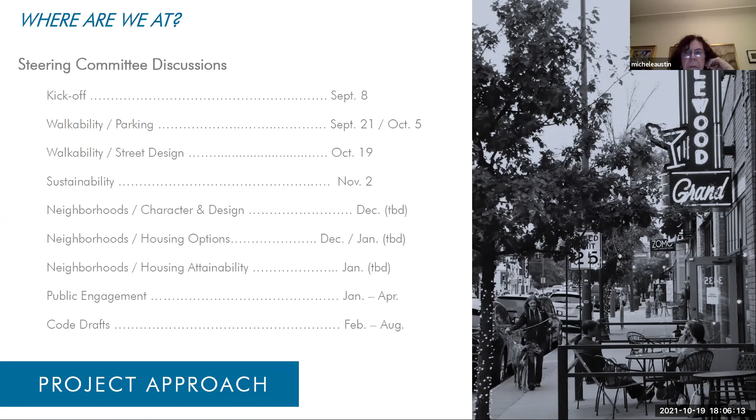Okay, people have been asking me questions about what we're going to talk about next, and I didn't have an answer for them. So, okay, great. Thank you. Yeah, and we didn't either, really, to be honest, other than we knew we were going to address those 5 topics, but we hadn't organized it in this fashion. So it's a timely question, and we'll get that information more broadly disseminated. Perfect, thank you.

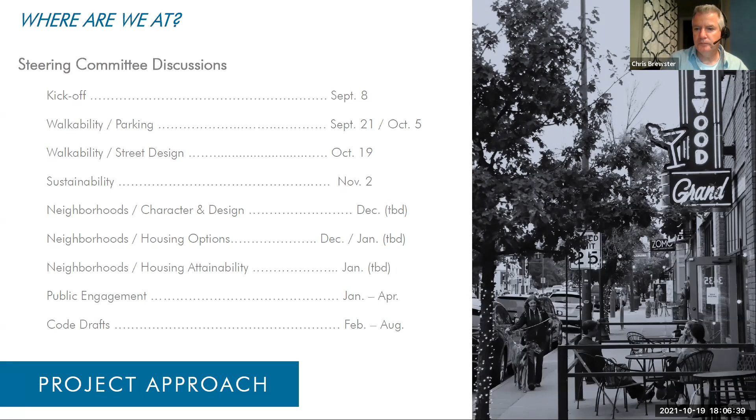Any other questions or thoughts on the big picture? Okay, as I mentioned, so... go ahead. I got a question, it's not really a question, it's a request I guess. The phase 1 questionnaire, has that been distributed? And if it hasn't, can we have that distributed to the Planning and Zoning Commission?

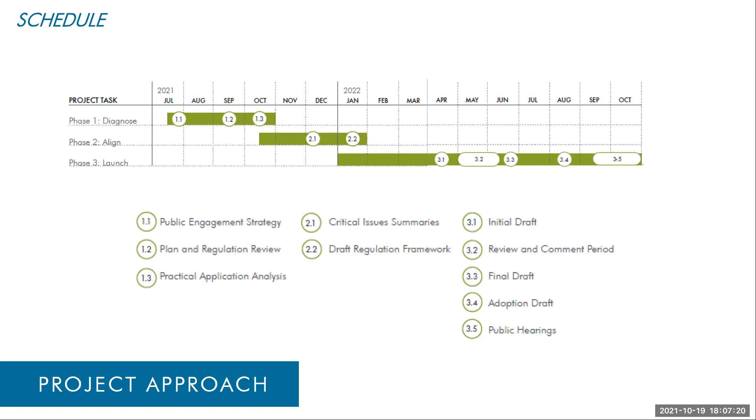The results of that questionnaire? We haven't done a questionnaire up to this point. Can you help me out with that?

Somewhere in the presentation tonight, it talks about a phase 1 questionnaire, so we'll eventually get to that. When we get there, I'll point it out. Just raise your hand again, and we'll talk about it when we get to that point. Thank you.

This is just a graphic representation of the schedule, showing us still in the fact-finding, information gathering, and discussion phase, and then beginning some of the drafting and putting strategies and solutions together throughout the beginning and mid part of next year.

So why does street design matter? If you remember back in our kickoff meeting when we talked about our approach to codes, we take a design-based approach, and that was what your plan and code assessment suggested—more regulations on building form and community design. From our perspective, it all starts with the streets.

The streets set the context for a lot of different things, and the design of the streets will tell us a lot of what we can expect from development. It's critically important to know what's a reasonable way for the regulations to request or require development to respond. So it sets the context, and the relationship of projects to the street is crucial.

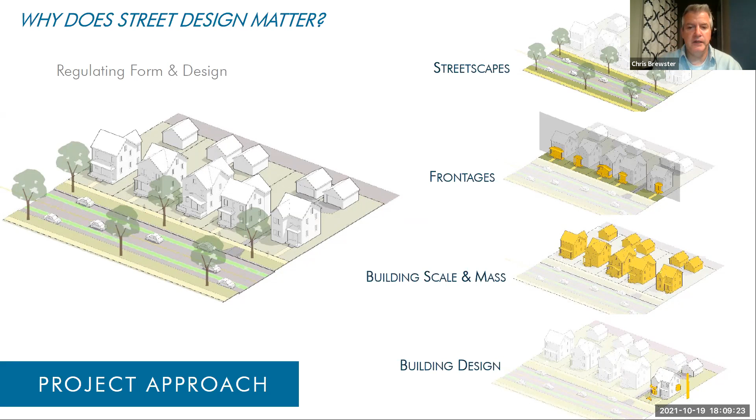It goes from streetscapes to frontages, then we begin talking about building scale and mass and how places come together. The last part becomes building design—what a building actually looks and feels like when you experience it. But it all starts with the streets in our mind, and with walkability being a key goal in the community, it even more so starts with streets.

So what does your development code say? Honestly, not a lot, which isn't necessarily bad, but it does create some questions for us and things we need this committee to discuss. It's addressed in two main places in the development code.

There's a section in 16.6.3 that talks about access and sites, discussing streets at a number of different scales—clearly a section geared more toward site access, but it begins talking about vehicles, pedestrians, and streets. It's also listed in 16.8.7, your subdivision regulations, where we most often find streets addressed in development codes.

One key point, obvious to all of you: subdivision regulations deal with building and designing streets when you plat property and lay them out for the first time. You won't be doing a lot of that since you're essentially a built-out community and a lot of your streets are built. So you're not in a situation where we'll be regulating the design of streets into existence through subdivision regulations, but we do want to make sure the development code coordinates with street design for reasons we'll hit on during the discussion phase.

The second place the code addresses streets is where the development code refers to the design and construction specifications—a separate document, with sections 1-2-3 and 1-2-12 covering street design. The good news is they coordinate. We often run into cities where those two documents don't coordinate and conflict, requiring reconciliation. At least in your case, those two documents are singing from the same sheet of music.

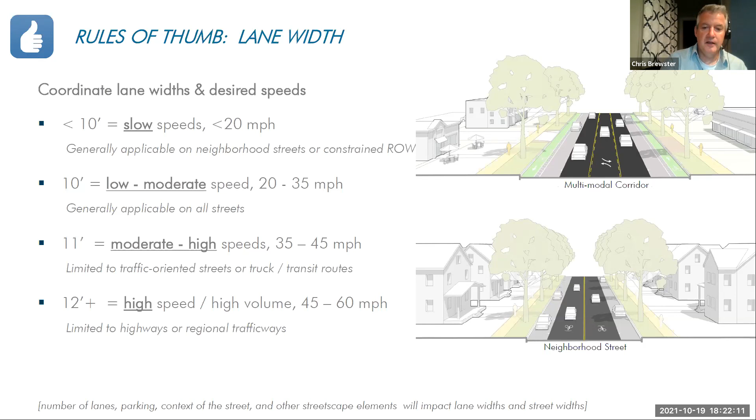The second one is on parking, that good friction. Typical widths we see would be on a residential street, 6 to 7 feet; on a commercial street, 7 to 8 feet. And angled parking, if you had enough right of way, anywhere from 14 to 20 feet, depending on the angle of the parking and whether that car is backing into a moving lane or a secondary lane. All of those decision points go into that.

The one point to note is that on residential streets, using a 6 to 7 foot lane accounts for the idea that the average car is usually between 5.5 to 6.5 feet wide. So 6 to 7 feet, you might say, isn't enough space. But on residential streets, it's assuming a lot of curb space is being absorbed, traffic volumes are low, there aren't as many conflicts, and doors entering traffic aren't as many conflicts either. That width seems sufficient to balance those things—not in every case, but as a rule of thumb. In commercial settings where you expect frequent on-street parking and frequent traffic, that extra cushion to absorb the entire parked vehicle is important.

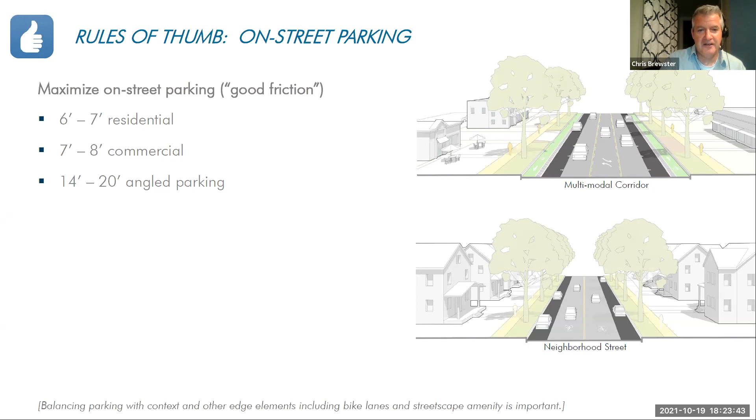Parking lanes compete in priority with bicycle facilities, and some general rules of thumb apply there. The main one is that what's important is comparable speeds. So bikes on sidewalks is not a good idea—those aren't comparable speeds when you think of bikes as transportation. People walking at 2 to 3 miles an hour and a bike at anywhere from 10 to 15 miles an hour—that's a conflict, too great a speed differential.

When you move bikes into the street, the rule is: the higher the traffic, the more protection you need. These widths range from no facility—because the street is tame enough that bikes and cars should comfortably mix, due to vehicle speed or low volume, or a side street situation—to the Sharrow, a term coined by the city of Denver, which may have some baggage depending on which camp you're in on bike transportation. But it's at least a strategy to consider when you don't have enough space for a dedicated facility and speeds are low enough that giving bikes extra cushion, signed and posted, can accommodate them.

But the ideal is really a dedicated lane, anywhere from 5 to 7 feet. That depends on whether it's a curb edge with no conflict with parking, or a situation abutting parking where there are concerns about door openings. That 5 to 7 foot dedicated lane seems to be the sweet spot. Anytime you get speeds over 40, you're talking about a significant speed conflict, so there should be a protected lane, off-street facility, or something similar. Again, these are just rules of thumb to help figure out what we can do with the limited space we have.

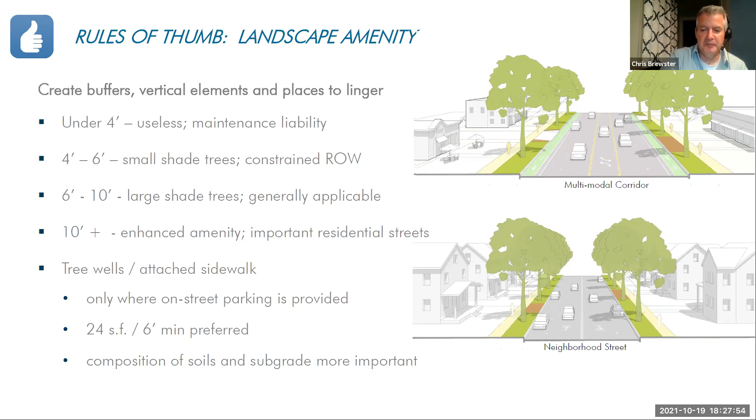So these are just some of the good rules. The other part about trees - our landscape architect constantly counsels us that regardless of the space, whether you have just enough, not enough, or plenty, what really dictates how well trees do is how they're planted and the composition of the soil and subgrade. They're big on the idea that you can get a great street tree in anywhere, it's just a matter of how you prepare the area and plant it. But thinking of the space in this dimension can still help us.

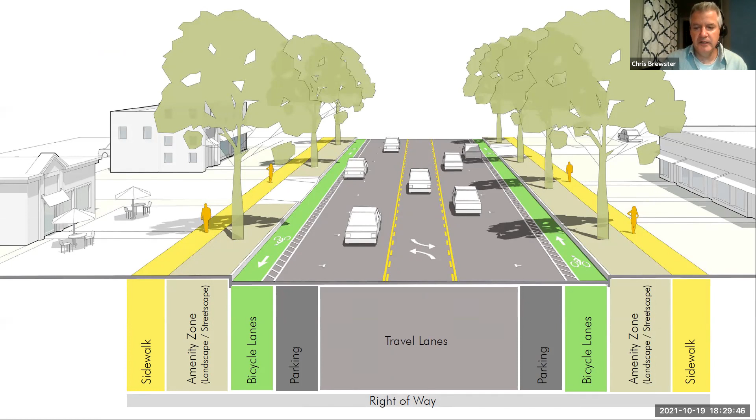Similarly, for the standard local street, this is the minimum right-of-way width, minimum sidewalk, and a roadway width that's fairly wide - it's 36 feet, with not a lot specified about what's supposed to happen within that space.

So we just put in the parking and the lanes according to that rule of thumb, and you have a lot of leftover space on these streets with that standard. So this is one way to think of that space and rearranging it, taking some of those amenities and actually expanding them out. In the 50-foot right of way with the 36-foot wide street, you can't fit these things. So this would bump up to a 60-foot right of way, adding to the outside, but we're still left with that wider street in the middle.

So then we did another scheme that took that 50-foot right of way and simply rearranged it. I think you have several streets that follow this cross section: it's 28-foot wide, and from our Google Earth rough math, we found several of your local streets with this quality, even though it didn't meet the minimum code, which suggests the street needs to be 36-foot wide on a local street. But having different solutions for different contexts, this would be a 50-foot right of way that apportions the street to some of those things.

The other thing to point out here is you can start to see the approach to bicycle lanes and parking and where you balance that. This one suggests they merge because it would be a slow, low volume street, so a bike facility wouldn't be needed and more frequent on-street parking could be done. There would certainly be other streets, whether a priority bicycle route or just too busy to have bikes and cars merging, where you'd see the parking disappear and a bike lane go in its place.

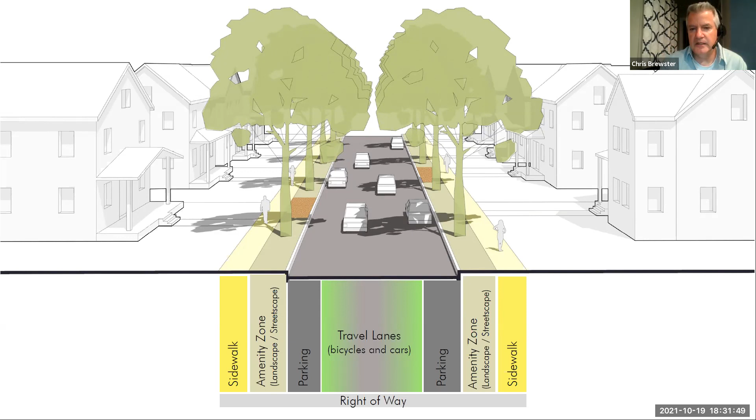So those are all decisions that can happen on a context by context basis to get better street design. Again, to the extent that your transportation plans and policies haven't accounted for these things, they're not difficult to build in with some simple rules of thumb to help give us cues. It may not answer the question for a standard in every situation, but it can set up a decision-making process. So we've built things like this into development codes where it may not spit out a specific cross-section, but it would spit out a thinking process for how we utilize that 50-foot, 60-foot, or 80-foot right-of-way, depending on the context and some of these balancing priorities.

That's really all I have to introduce the topic and discussion. We did throw together some things, just our observation of what we think we want to accomplish with street design in the development code, particularly because of your unique situation that you aren't often platting new streets, but we do believe the development code needs to address these topics in the event that you do. We also want some document guiding the design of these spaces so we have an answer for when these things need to be coordinated with development.

So our objectives: one, we want to better coordinate the development code with other standards and outside guidance rather than just punting to them. We want to make sure we know what's in those as well, so that they're all speaking the same language and accomplishing the same goals. We also believe we need more specific guidance for different contexts so that we can answer what's going on within some of those spaces.

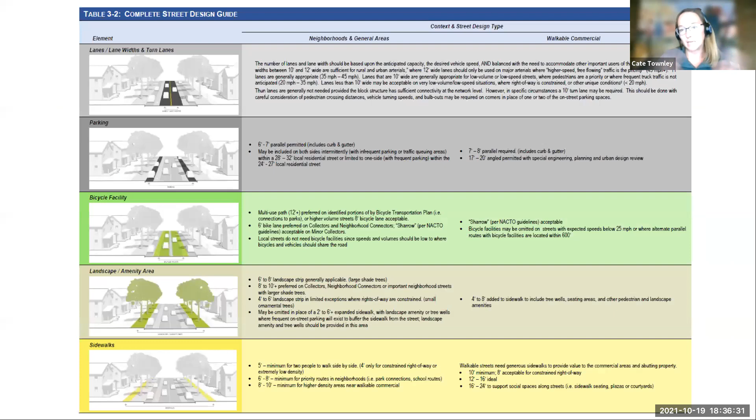And I don't know, I personally would be a lot more comfortable having more protected bike lanes, even with cars going at a lower speed next to people. And I think there's been more research coming out showing the return on investment, and the higher use of lanes that are actually protected and separated from cars versus just a dedicated lane.

And my personal opinion, I don't even think sharrows should be an option because I don't think they do anything. So I would want to just get rid of those, and we should expect bikes on every street.

So I definitely appreciate all those different suggestions. I'm wondering, what is the role of the city traffic engineer or transportation engineer in terms of—we put in best practices, refer to NACTO or things like that, and then it's essentially still up to the engineer whether or not they get implemented. So I guess that would be one question.

And another question I would have, and you can address this later—at least the experience I've had on my street is that the street is wide enough for cars parked on both sides, and this is just a residential street, and for 2 cars to pass each other driving. And then the right of way extends 10 feet up past the sidewalk into the yard. So do we have a sense of how much right of way we actually are working with within the city? Because that's a huge asset to have that much land within the city to potentially be working with.

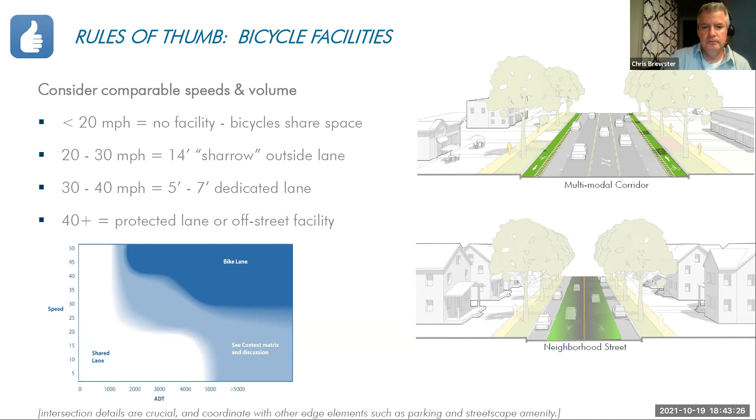Any other thoughts or questions or things we need to be aware of that you've encountered?

Christine? What are other cities that are built out like ours doing in terms of attached versus detached sidewalks? And if you have one house in the middle of the block that gets scraped and rebuilt, what do you do about that? Yeah, that's one of the discussions we had with staff last week - most of these projects, if the solution is a redesigned right-of-way, you usually have to address it on a block scale, unless it's one of those more interim strategies where there could be steps toward that end solution.

We're starting to look at some of those options, but there's no magic answer for that, unfortunately. The worst scenario is a one-lot development where the rest of the block doesn't have any impetus to change the cross section. Those will be really challenging.

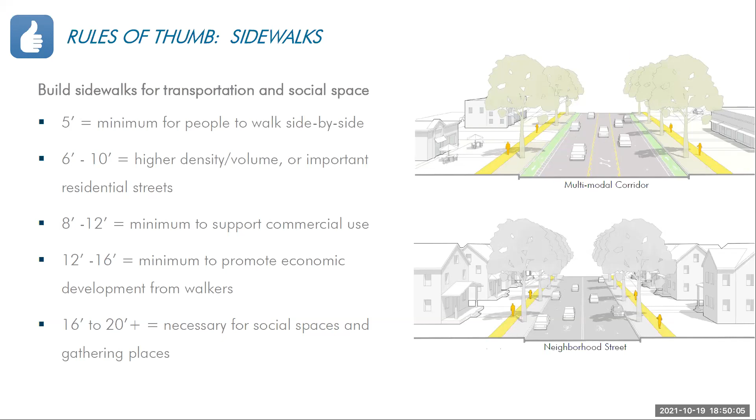Thank you. Yeah, I would say it would be good to make sure that we have accommodations for benches and outdoor seating and have them be welcoming to folks. I was reading an article from China where, in one of their cities, you now have to pay to use a bench in a park, and after your time's up, spikes come up and you have to go. It's essentially to keep people moving. But the purpose really is to keep people hanging out, which often means they're creating more connections and visiting businesses. So I think it's good to be considering those social spaces in these gathering spaces.

On this particular slide, something to think about is that we've heard through a lot of other feedback sessions how important our parks are and how much people value parks, yet we don't have much more space to build new ones. So really being able to think about these wide right-of-way areas as places to have linear parks, more opportunities for trees and shade, or benches for people to hang out. A question would be, if we suggest changes like that for the code, how that may impact public works versus parks and recreation, and if there's support from those departments to create more social or gathering spaces along different right-of-ways.

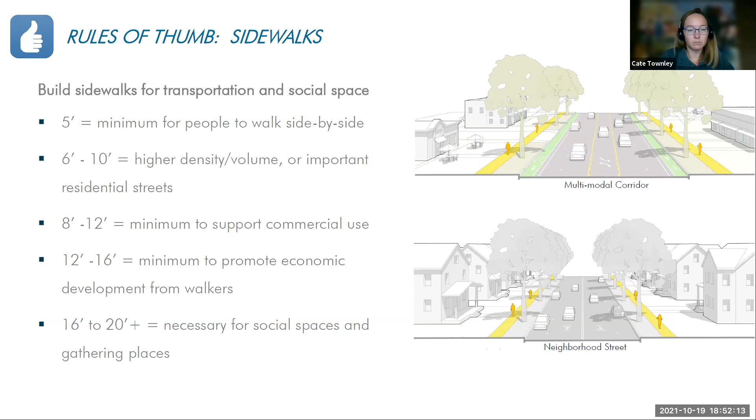Any other thoughts or suggestions? One of the things I think we would expect to do is compile some of these comments and notes to add to this list of objectives and things we need to be coordinating, and getting back to you all with answers. But then also for the next meeting, coming back with something that confirms the direction, or at least things you want us to be exploring, or where there is consensus on what we're trying to achieve, perhaps even helping direct the drafting already. We want these discussions to build into our broader public engagement, both at the public level and the technical committee level. You all have brought up a lot of things that will need coordinating between different departments. That's really helpful for us too.

Cate Townley? I might as well ask one more thing. I'm wondering about, in terms of coordinating and what's possible, moving a curb can be very expensive, or impact stormwater and things like that. So I don't know if the code is the right place for this, but where might there be opportunities to still narrow the right of way or narrow the lane widths without moving the curb? We have an example of that with the mid-block crossing on Broadway, creating a bump out, but they didn't actually move the curb and gutter. So can we still think about some of those things as we're considering different sidewalk widths or street designs that may not require, maybe at some point we'll have enough money to change the whole stormwater system and the gutter system, but other things we can do for now, or other possibilities that may not be as intensive in terms of changing big parts of the infrastructure.

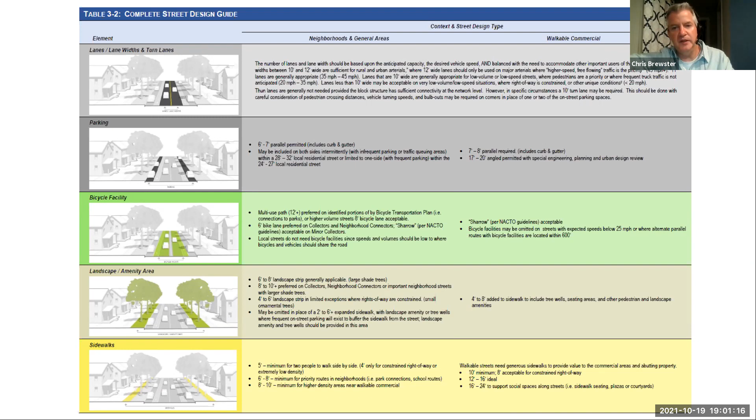We know we're not going to spit out the exact right cross section every time, so this could be another tool that either lives in the development code, is an appendix to it, or is something that's used to coordinate some of those separate documents. So that would be the second thing.

And then I'll go back to this table right here, it's in the development code. What I would see as an easy fix is that if we know the sidewalk minimum needs to be bumped up, if we know there's also a landscape amenity and a bike lane amenity missing from these typical streets, and if we know the arterial street might be a multimodal transit arterial, a traffic moving arterial, or a walkable slow street arterial, it's very easy for this table to expand and give some of those parameters as well.

I think this is a given that this is in there now, and we want this to have some simple amendments that start to account for some of these things. It could then refer to that decision document I had up, the colored matrix that starts to identify some of the trade-offs and decisions.

It could end up in some basic cross sections that we know will work in most cases, and those go in here. But this table right now is exactly coordinated with the design and construction specifications, where most of the guidance is coming from. So we would expect those two to coordinate when we're done with this as well, regardless of whether there's just a few simple amendments to this table that get us going down the right path, or if it becomes a little bit more of a complicated table. I think it'd be pretty easy for those two documents to continue to coordinate.

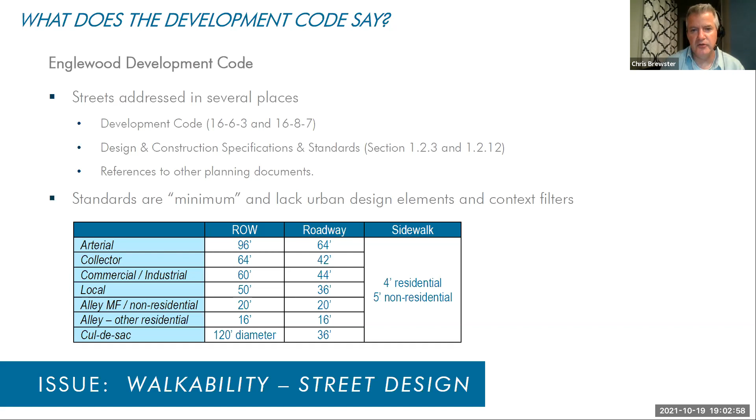I think the harder problem is that a lot of these discussions or bigger picture planning policies need to be addressed in these documents. But without knowing an exact answer to your question, I think there's a few things that we know we can do as a bare minimum to get some of these ideas incorporated.

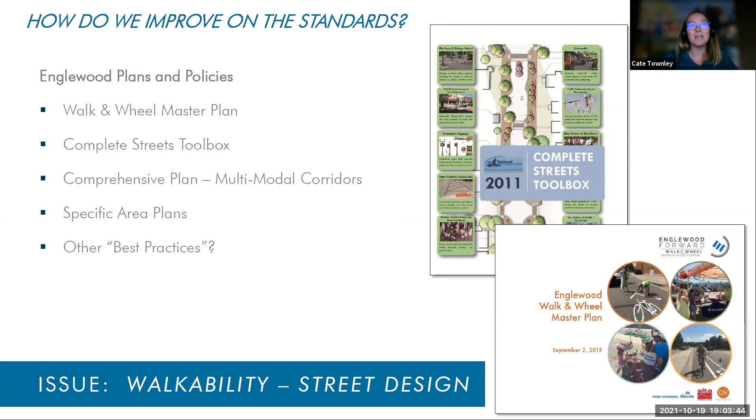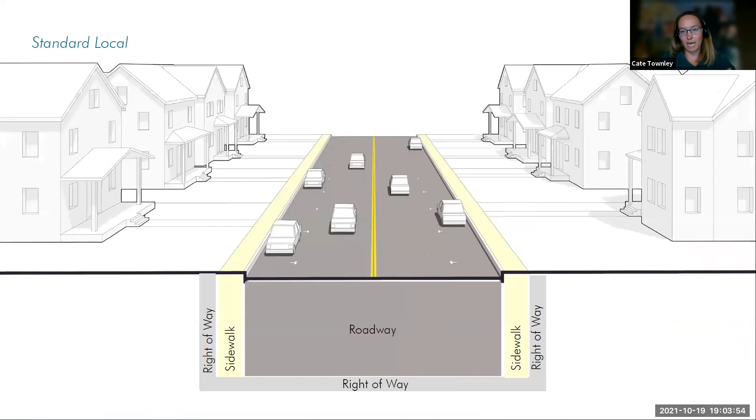I guess this might be another question around a coordination piece, or thinking about what the street standards and sidewalk standards would be, but how that relates to different setbacks. So the setbacks, we can be able to really address quite a bit through the development code. Sorry, I don't have this question formulated that well, but maybe what comes first—and this might have to do also with whether you're being proactive or reactive to a situation.

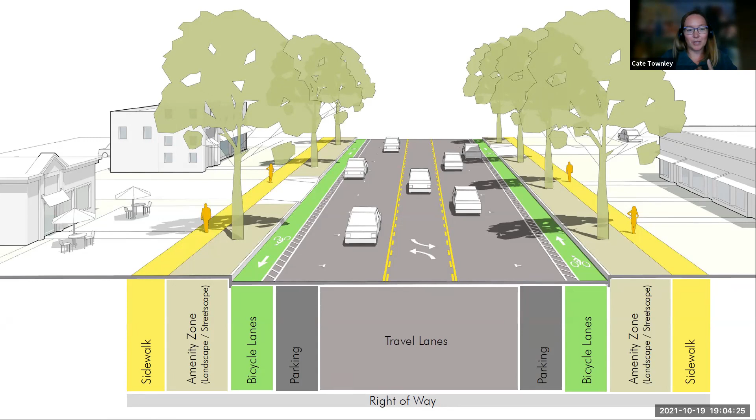An example might be several years ago, we were looking at an overlay for Oxford Light Rail Station along Windermere Street. Say you wanted to update that zoning and have it continue to be, or have it be zero setbacks, because that would make it more walkable. In my opinion, it's not necessarily going to make it more walkable if you only have a four-foot sidewalk. So how do you balance that? What comes first, the setback piece or the sidewalk piece?

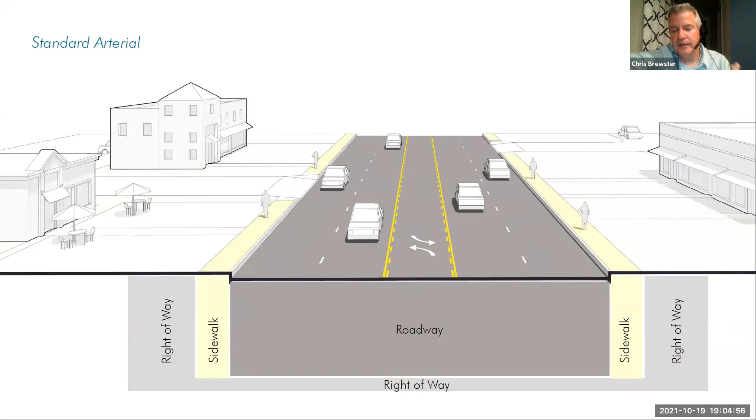That's a great question, but you just summed up exactly why we think this is such an important topic of the development code. The best way I can sum it up is, this is a street that would, according to the code, meet your standards. It's a street where we would say it doesn't make sense to have a walkable development pattern with buildings built right to the street, because the investment in the street doesn't warrant it.

Whereas this street, particularly if that amenity zone filled in with some of the benching and seating like you mentioned, would be the exact opposite. You would expect the development to be right up on the street, and you would in fact want to require it.

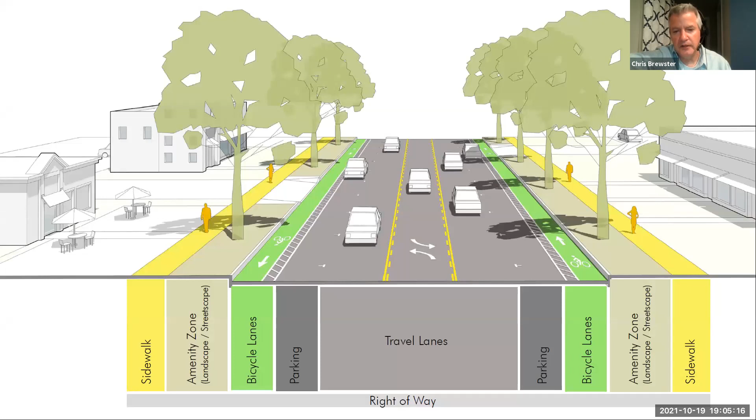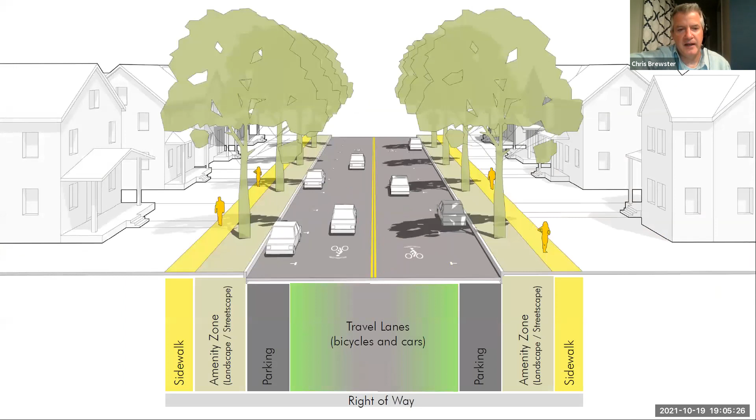So those are the exact cues that we want the development code to be responding to. Similarly, from a residential standpoint, this would be a pretty good street to have a reduced setback and maybe houses tighter to the street. This one maybe not—it's the ordinary larger setbacks where the front yard is the amenity. So that's the coordination that we want to achieve.

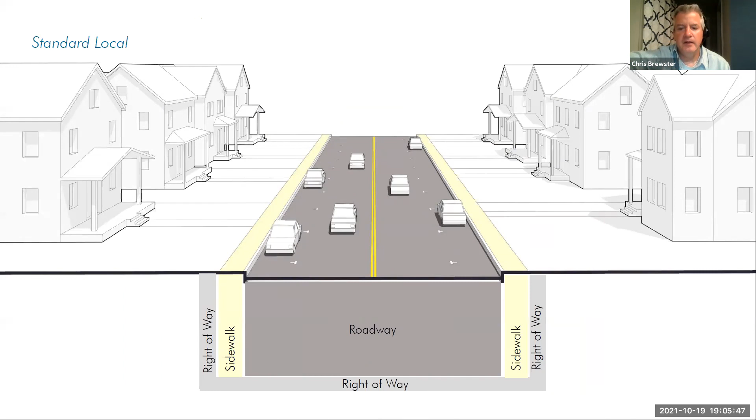The tougher question is which comes first. There is certainly a chicken or the egg scenario that we're going to have to figure out. And that does go back to that host of strategies—what do we do when it's just one lot in a block versus a bigger picture fix? So those are all things that we'll need to collectively figure out.

Hey, I have a comment on that. This is Brooke, I'm a senior planner here, and yeah, I think some of our—we changed some setback regulations many years ago to try and encourage buildings to come up to the street.

Especially on places like Broadway, where we did not want parking lots in front of retail buildings. But I think in some cases we didn't have enough right of way. And I'm not suggesting that the city try to acquire more right of way, but that sort of pushing or encouraging through our code businesses and development to come up to a 0 setback line, actually where there was not much room to do many things, has actually created some issues where we don't have enough room to do what we would like to do with our streetscapes. So if the goal is to not have parking in front of businesses in our commercial corridors...

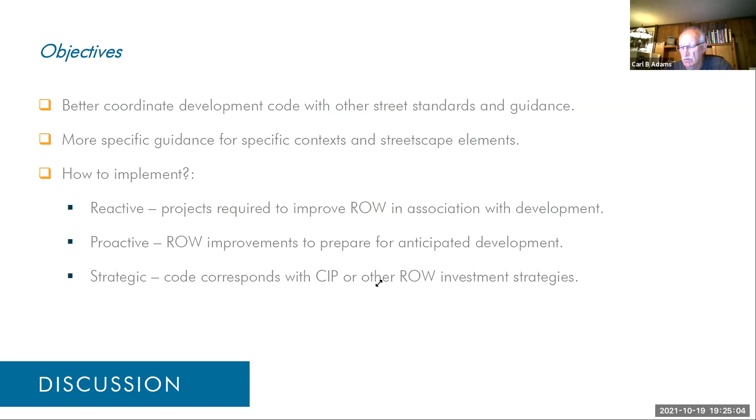I got a comment on the Ironworks area. I was up there and drove down their street, and there were cars parked less than a foot from one another. I don't see how it would be possible to get them out of the parking space. The street was totally lined with these cars, and it was fairly tight to drive through. There's no way a ladder truck could get in there, and probably not even a small fire truck. I'm not sure how they're really working that up there.

But that's a real issue, the parking up there is really tight, at least it was when I was up there a few months ago. So I just wanted to throw that out there.

One question I got is whether sustainability will be on the November 2nd meeting. Yes, that's the plan.

The thing I was talking about earlier, that phase 1 questionnaire, was on the third agenda item tonight, the UDC assessment, parking and walkability under what we heard. They talked about the questionnaire under that topic, but we never got to that and it's not going to be talked about, so I'm not sure what that even is.